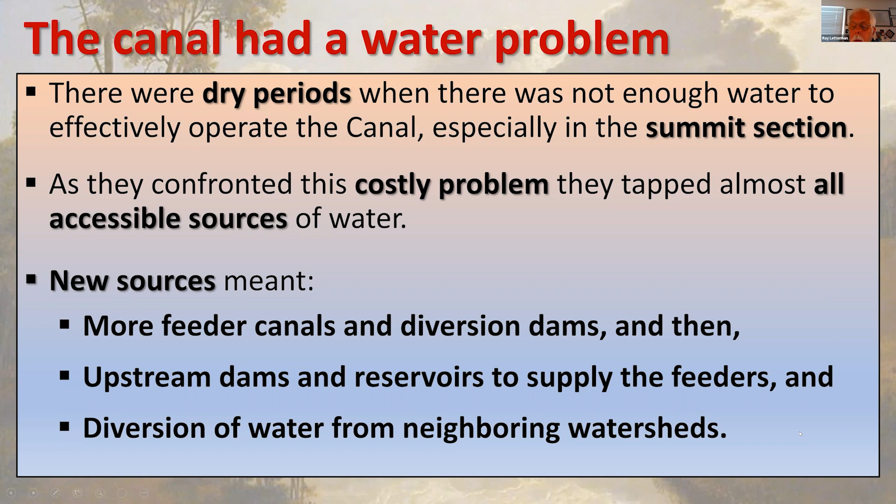So as I started to say earlier, the water problem was greatest in the summit. Here's the summit section. In the very, very beginning, some people thought that they had a very good source of water at Lake Erie. They could use that water all the way down to Albany. And of course, you would have to have a much longer canal because the canal would have to move south toward higher ground all the way along.

And you would lose water, of course, as it flowed across the state, and the amount of water that you would have to have flowing up here to meet the needs of leakage and so on down, and to make the locks work and so forth, would be so huge, it would be like a water slide at a water park, I suppose. There would have been just too much current up here for it to be usable. So that was impractical, but Lake Erie took care of the western parts of the canal very well.

And then in the middle here, of course, what do we have? The Finger Lakes. They put dams on, I think, all of the Finger Lakes eventually, and would release water during dry periods, and water problems weren't that great over in this part of the canal. But here in the summit section, there were problems, and I'll explain a little bit about that. On downstream here, going from Utica, the eastern side of the summit, on down all these locks, they were able to make do with the water that was flowing in that direction from the summit, and a few sources along the way.

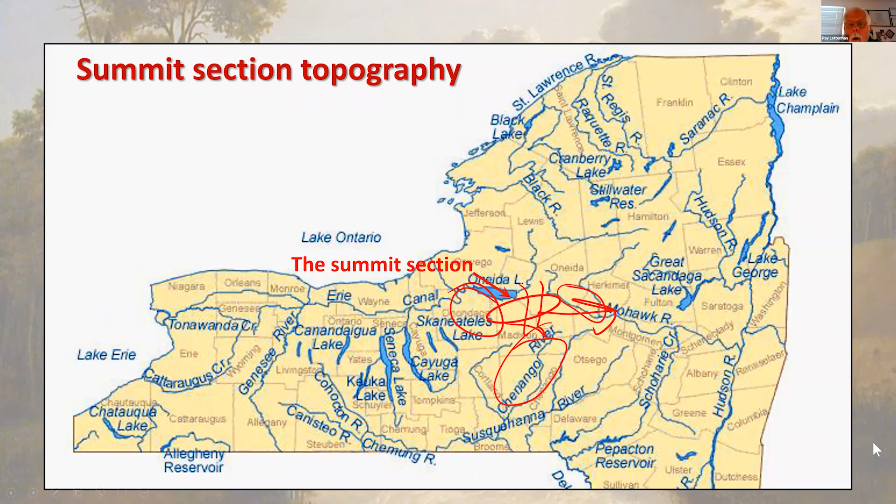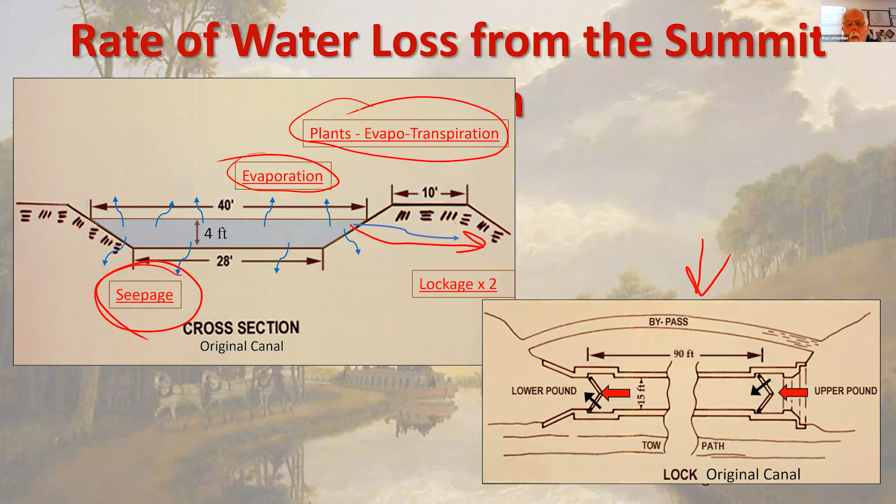You also had these losses, and this was the important one. I'll show you in a minute. Seepage, especially through the man-made fill berm where the towpath was located. You had a little bit of loss to evaporation, and there were often plants growing along the edges, and you had evaporation from the leaves of plants, evapotranspiration. So that was part of the loss. Let's just talk about the total that you can see. Seepage was the greatest flow rate. Evaporation, not so much.

Lockage would be at maximum when locks were being filled and emptied, say every 20 minutes or so, every hour of the day, which of course would be rather unusual. But that represents a maximum loss through lockage. So we end up with about 200 cubic feet per second for the summit section. Just for comparison, the City of Syracuse uses about 70 cubic feet per second of water for its drinking water supply from Skaneateles Lake. Limestone Creek below my house averages through the year about 150 cubic feet per second. So if that helps you picture water flow, that's what we're talking about.

But this is very important: over that 60-mile summit section, that loss of 200 cubic feet per second would be about 8 inches of depth per day. In the original canal, they only had about half a foot of depth to play with, the clearance below the bottom of a loaded boat. In the enlarged canal, you had about a foot. So it didn't take very long before you were in trouble.

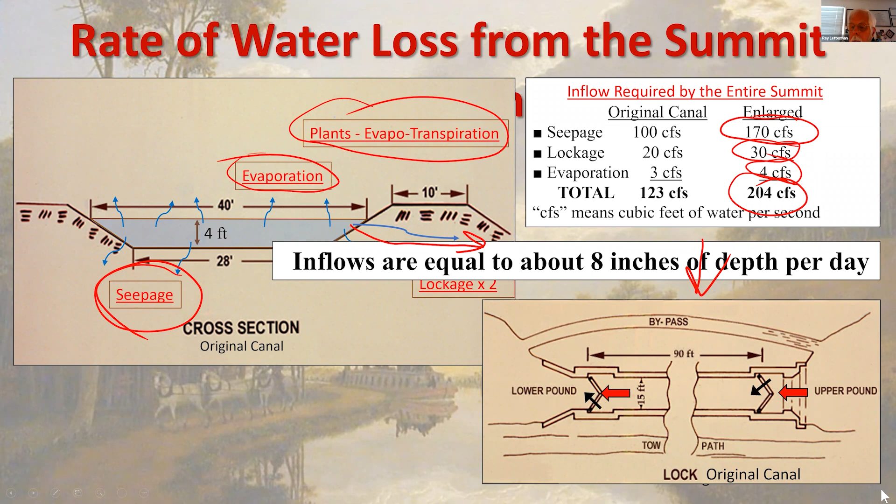And the troubles were the following. When the clearance between the boat and the bottom became less than, say, 6 inches or 1 foot, then drag increases. The water that you're pushing out of the way has to move underneath the boat, and it increases friction on the bottom of the boat, and it increases the work that the mules, horses, have to use. And I asked this mule what he thought. They don't like it.

The other problem was that when you had low water, the boats could not carry a full load. So for example, in the early canal, if you had a 30-ton cargo, you could gain about 6 inches of draft if you reduce that load to, say, about 23 or 25 tons. But the owner of the boat didn't earn as much money. And of course, the Canal Corporation didn't make as much from tolls if they had to reduce the load. So when I said it was costly, that's what it cost in terms of loss of tolls and income for the boat owner.

There were also long waits and lines at the locks. And I read in one of the good books, maybe about the Erie Canal, that there would be long lines; you'd have to wait at a lock for someone to come down before you could go up. And during these long waits, the people working on the boats would run to the nearby tavern and try to get back on the boat later.

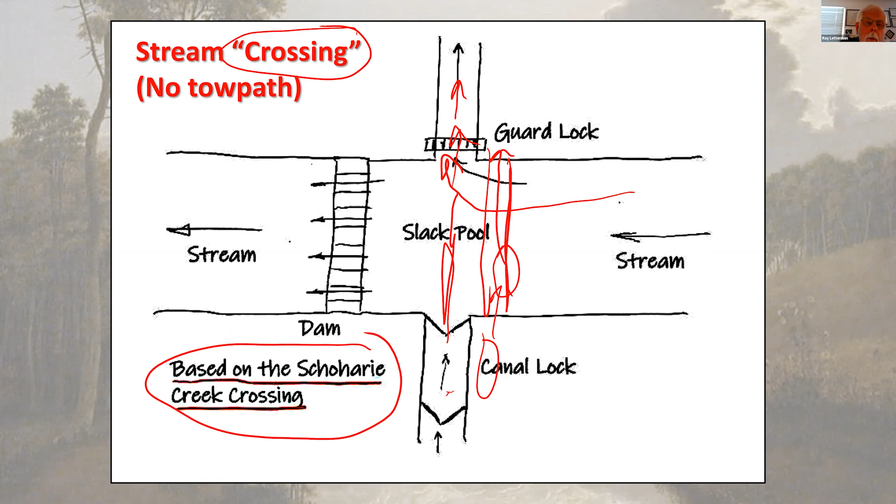Did anyone hear the lunchtime speaker at the Erie Canal Museum the other day? David Brooks, I think his name. He's the person who looks after this historic site at Schoharie. But he said they had so many problems with the dam washing out that they eventually put in a big aqueduct. And then this canal right here became a feeder canal, sending water on downstream where it joined the water that came through the aqueduct. So they got tired of replacing this dam. After this it just became a feeder system, which I'm going to talk about next.

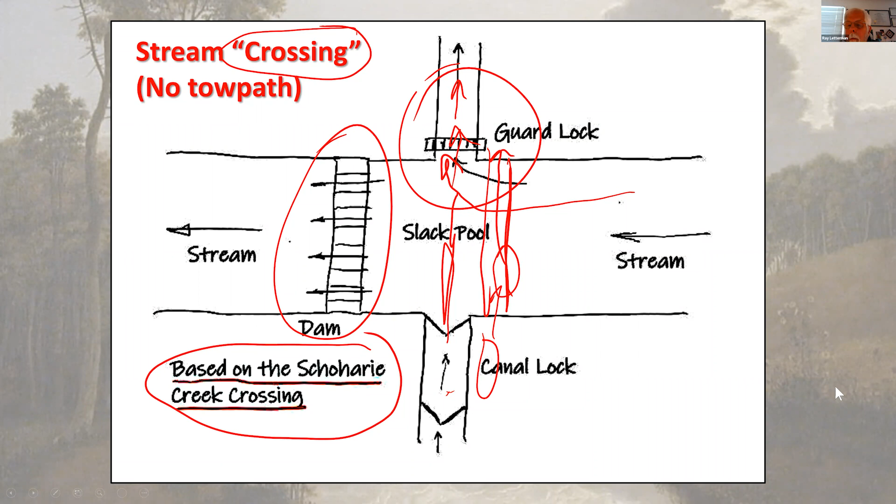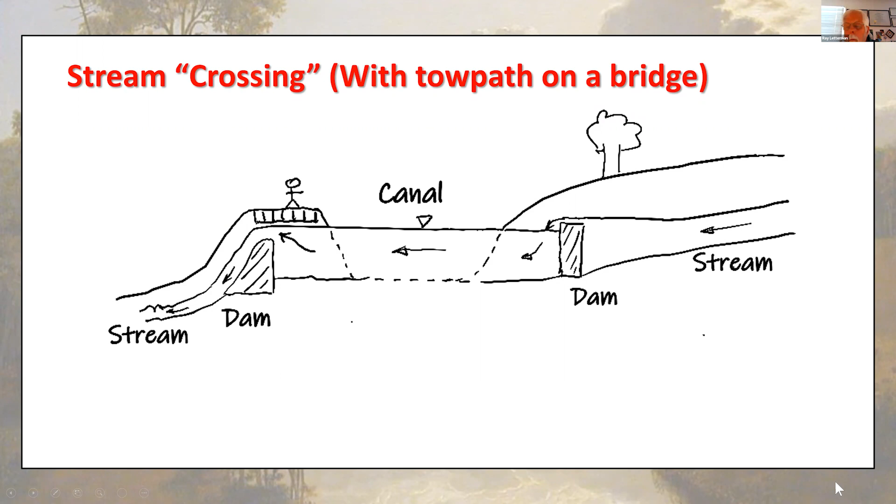So this is a stream crossing, just like you might see on a level spot, like at Rome, where the water can go in and out of this elevation drawing. They put a dam or a weir over here underneath the towpath, a bridge over the towpath. So there were other arrangements that you'll see if you find any parts of these supply locations.

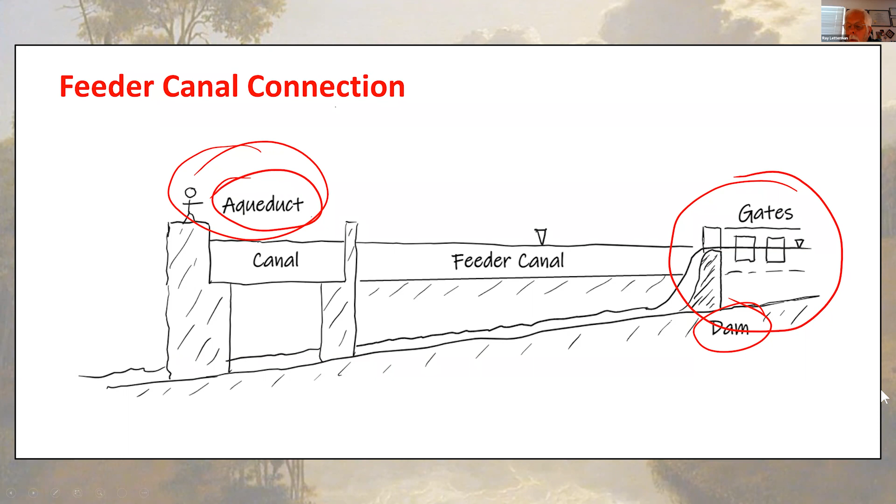But if you're going across the canal, look for aqueducts. There's a feeder canal, or at one time there was a feeder canal and a diversion dam and gates and so forth. Many of those are gone now, but we've got a few still left in the area, as we were talking earlier.

Here's a crude plan drawing of the feeder canal. Here's the feeder canal tucked in along the hillside near the stream. Here's where the stream goes down and under the aqueduct, and the gates controlled it. When you had a flood in the stream, you could use the gates to protect the main canal. And that was very desirable, because with the canal operation, they hated floods. Floods were very expensive. They were always repairing flood damage in the late spring.

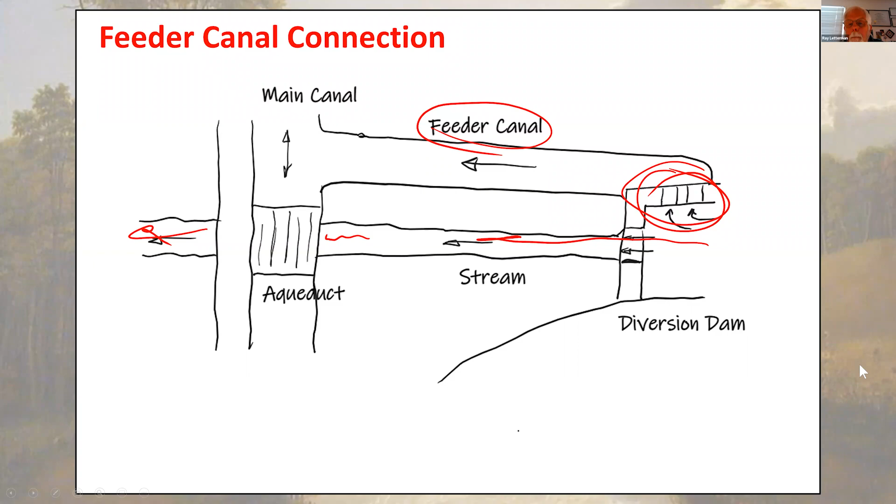And here's, of course, our good old Limestone Aqueduct on the Old Erie Canal State Park. This is going over to DeWitt, and this was built probably back when they were turning this part of the Erie Canal into a feeder for the Barge Canal. This channel was built so the water that came from DeWitt, from the Butternut Creek feeder, they call it the Orville feeder, had a way to get over toward the summit of the Barge Canal near Rome. So this was basically a conduit that made this a part of the feeder system for the Barge Canal. And of course, today we benefit from it because it makes the park better.

And of course, these gates are over by Fayetteville by the new bridge. The state took the dam out, I don't know, 10, 12 years ago, maybe. These gates are not for the canal, but were there to control the water to the old canal when it became a feeder stream for the Barge Canal over by Rome. I'll show you here an old picture.

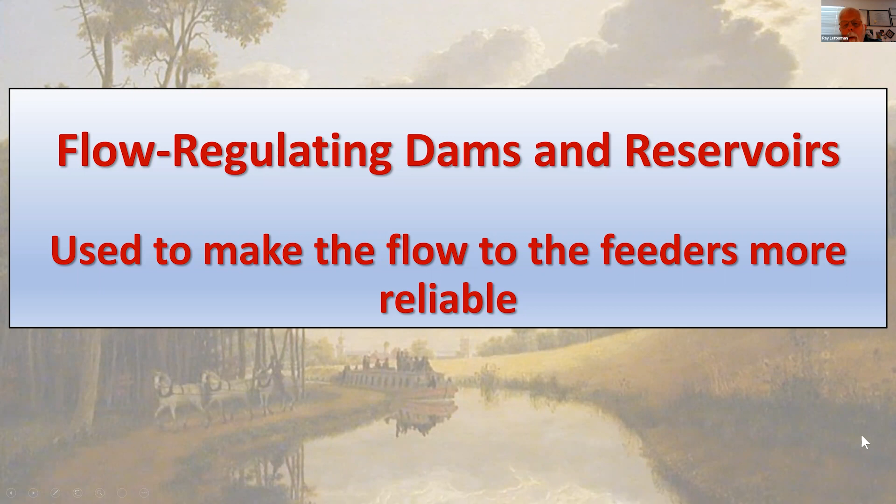So they didn't, in most cases, get enough water. They would add a feeder canal, diversion dam, and so on, and then they'd have a drought, a dry period, and there would be problems with water depth. And so they would then go to the next stage. Remember, this was a trial and error type process. And they built dams, large reservoirs. And these were never tiny reservoirs. These were hundreds to thousands of millions, like a billion cubic feet of stored water. These had to be fairly large to be useful at all.

I wanted you to see what all the original dams were, these stone and log wood crib dams. This is from a picture over on East Canada Creek. That was the only good log crib dam picture I could find. After about 1900, wherever they wanted to keep a dam, they built concrete dams like this one at Old Forge. This is the Old Forge Reservoir here, which is First through Fifth Lakes. They're above Old Forge, if you've ever been in that neck of the woods.

That, I'll tell you a little bit more about later, is basically a flow regulating reservoir for the mills at Watertown. That's why this was kept and why the log crib dam was replaced. But you know, this concrete dam is like the ones they kept; almost all of them, the change to concrete occurred around the turn of the century.

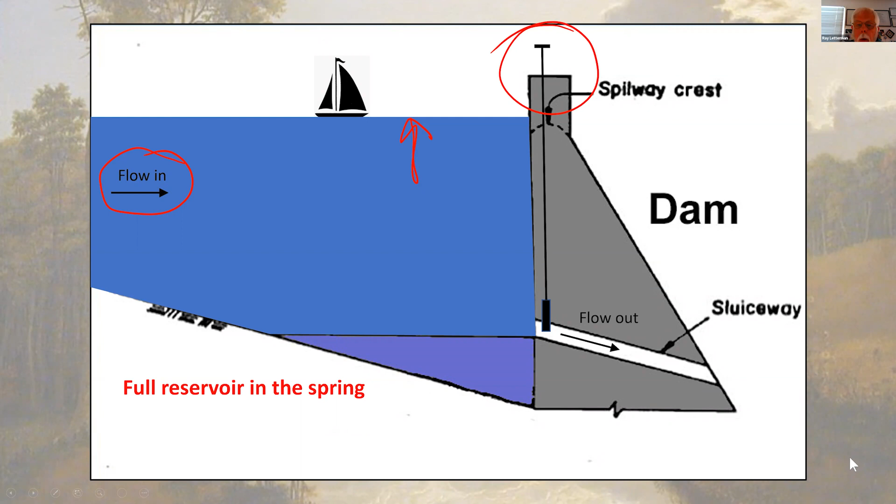They had a dam tender that tried to keep the dam from being washed out during storms, but also to be there to release the water when that needed to be done, during the next period, which of course is in the summer. Early fall was typically when you needed to augment the downstream flow. So that is what a flow regulating reservoir is. It's what they do today. And there are many of these around.

They're no longer in this area used for supplying water to canals during low flow periods, but they are used for hydroelectric generation. So to get more consistent, more profitable hydroelectricity generation, it's good to store water and release it during low flow periods so you can get the maximum utilization of your turbines. In the spring during high flow, the flow is greater than the capacity of the turbines in many cases. And then in the fall, it would be less than. So you release this water and try to keep the flow in the stream.

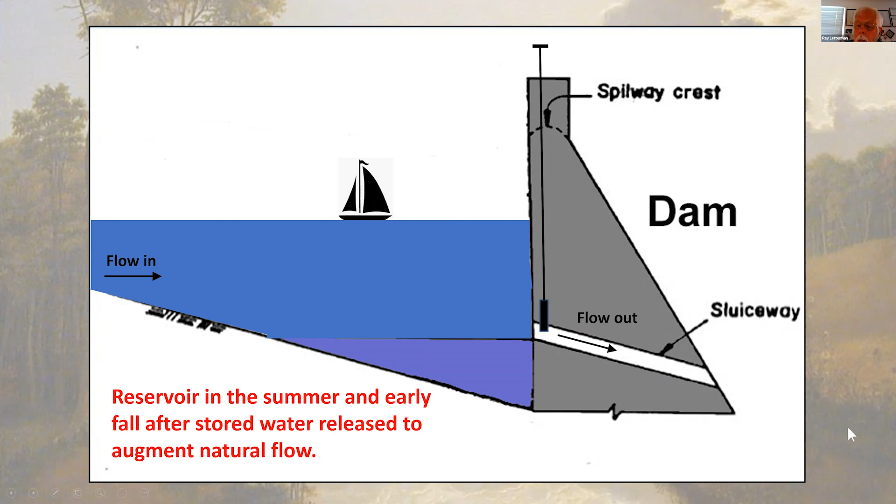And so just to give you a little picture of our local vicinity, the flow regulating dams and reservoirs over here, Onondaga, and then many of them over here in Madison. And all of these are connected to one of those feeder canal streams that I talked about. Almost all of them are connected with an aqueduct on the canal.

Here's the good old Summit section, over Syracuse. Jamesville Reservoir is, of course, on Butternut Creek, and that's what supplied water to the Orville feeder that we know goes in at the end of the park in DeWitt. DeRuyter is the flow regulating reservoir for Limestone Creek, and Cazenovia Lake here and Erieville are for Chittenango Creek. And of course, we had a Chittenango feeder. It's mostly all gone now, but there might be a little bit of it left next to the museum.

And then all of these over here were left over from the Chenango Canal that went from Utica down to Binghamton. When the Chenango Canal was decommissioned in the 1870s, they blocked it off here, and all these then fed into the Chenango Canal and went down to the Erie Canal at Utica. So they turned those into flow regulating reservoirs like the others, but used the Chenango Canal to get the water down to the Erie Canal.

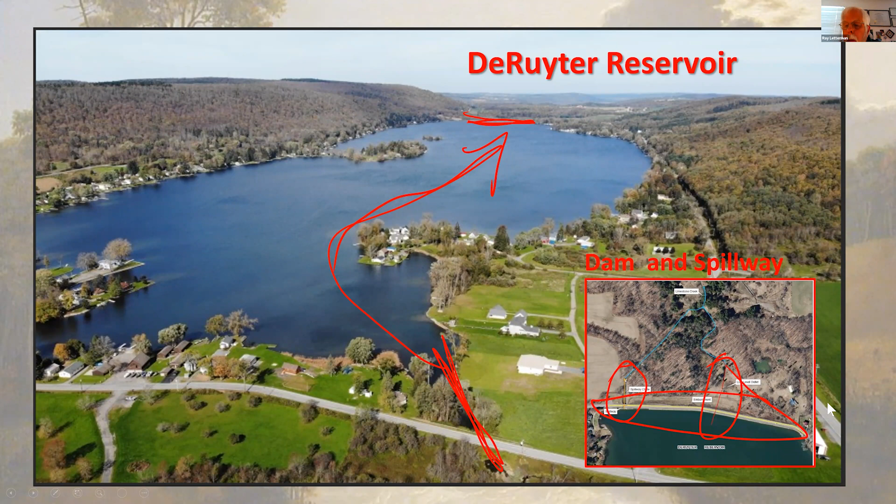So they added lots of feeders after the enlarged canal started in 1866, after they finished the enlargement. They left things pretty much alone as far as water supplies are concerned, except for this summit section where they had the most problems, as I've been saying. But if you look at the dates, Limestone Creek feeder was built in 1852. And then they probably weren't getting enough flow in the creek during dry periods, and they added the DeRuyter Reservoir. And likewise for Butternut Creek, the Jamesville Reservoir in 1874.

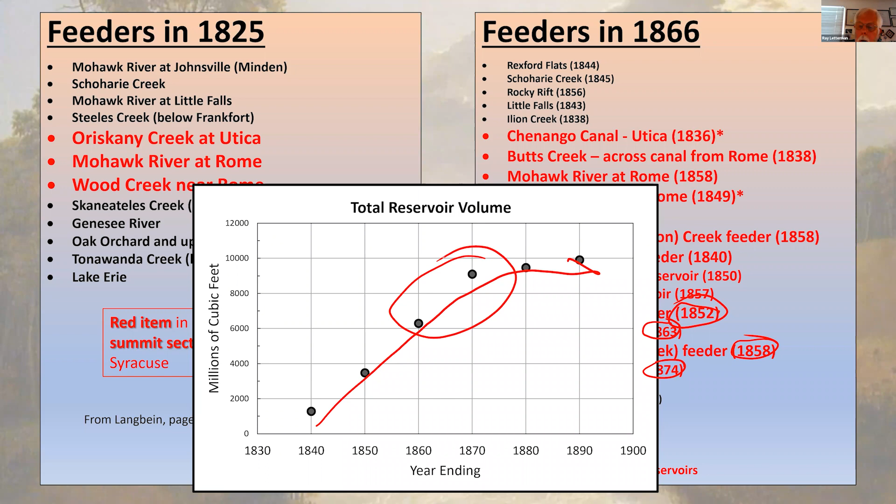So here's how the total reservoir volume increased. Much of this increase here is from what I'm going to talk about next, the Black River watershed up in the Adirondacks. So I mentioned this, the DeRuyter Reservoir, Susquehanna River water. It was at this location sent to the Great Lakes through Limestone Creek, Susquehanna River over above Utica, the connection to the Chenango Canal that I mentioned, and it sent water in some places to Oriskany Creek, but that was, you could argue, Susquehanna River water to some extent, and it was sent into the Mohawk River watershed.

And here's the diversion that caused interesting problems that I'm going to talk a little bit more about, the Black River, which is in the Great Lakes watershed. And it sent water to the Hudson River watershed. You could also argue that maybe some of that gets back into the Great Lakes, but it is still a conduit of Great Lakes watershed water to the Hudson.

The Black River. Here you can see the Susquehanna River water that I said went through the Chenango was here. The Susquehanna River water at the DeRuyter was here. And then we have the Black River watershed. These are in the Great Lakes. Black River watershed is in the Great Lakes watershed. And of course, the Mohawk River goes this way.

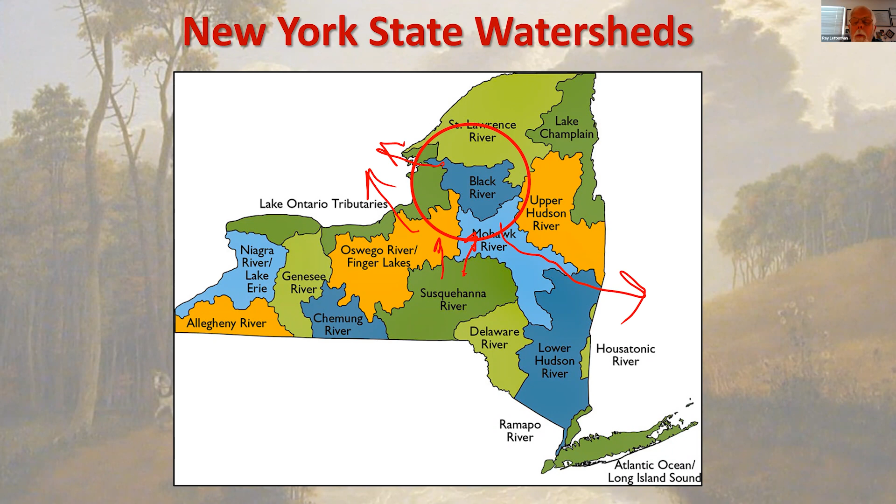So the Black River became a very important source because it is a wet watershed. Typical total precipitation in New York is 35, 36 inches a year. Up in the Black River, it's 50. And of course, a good part of that is like today, lake effects. Well, lake effects, no, maybe isn't the case today.

So how did the water flow from the Black River to the summit section of the canal? There was a low diversion dam and small impoundment at Forestport on Route 28. You cross the big iron bridge at Forestport going up Route 28. That is the pool there you'll see underneath the bridge that feeds into this diversion dam. Then they had this beautiful feeder canal from Forestport over to the village of Boonville, and then it flowed down the Black River Canal to Rome.

And the Canal Corporation, they were eager to get this water from the Black River for the summit. They weren't all that eager to build the Black River Canal, but the Black River Canal did give them a conduit down to Rome. And so the people in the Black River Valley up there, the farmers, and particularly the sawmill people, wanted to get their lumber to markets in New York City and so on. So they really lobbied for a canal.

Here's just a couple of pictures, current pictures. Here's the diversion dam over there. You can just barely see it. The truss bridge over Route 28 that most everyone has crossed, I would imagine. Here's the diversion dam. Of course, it was a log crib dam in the beginning. Now it's concrete and stone. Here's a beautiful feeder canal, neat bicycle path, 10-mile hike, bicycle ride.

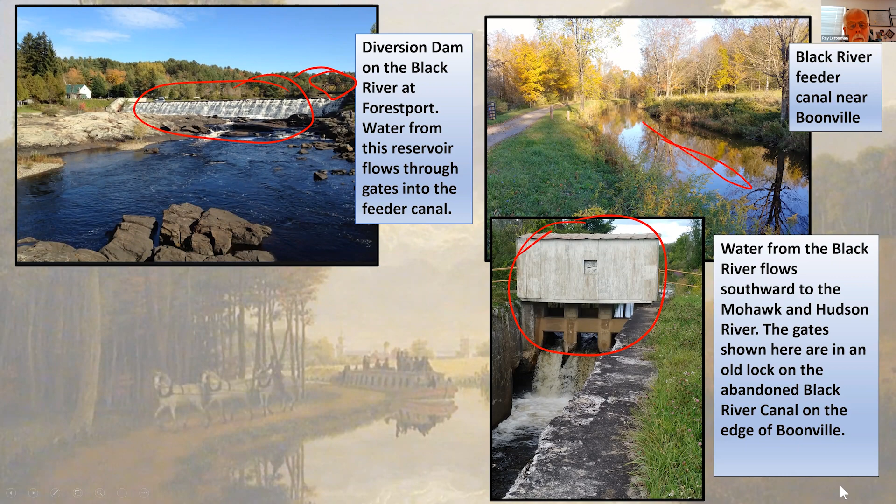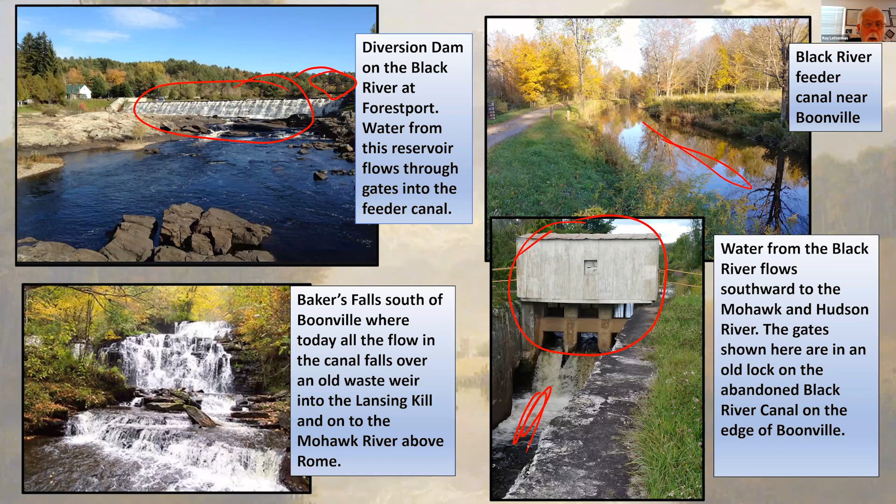Today, the Canal Corporation, this is a contemporary thing, there are gates because there are no more locks. The old Black River Canal is basically gone. There are parts of it in the valley there, in the gorge, but they had to build gates in order to keep this water at level in the canal and at their swimming hole over in Boonville and so on. So here are the gates that release the water. So today it still goes downstream to the Mohawk River, and they use it to fill the Delta Reservoir. This is where the water from right here flows south toward the Mohawk River, and it goes down a waterfall into the gorge.

So to design the system up there, they did some crude measurements. An engineer in the early 1830s looked at the flow rate in the Black River. They estimated that they could get about 260 cubic feet per second reliably, and they were wrong.

They used 80 of that to make the canal work on the downhill side down to the Black River at Lyons Falls, and then they used 180, and they sent that down to the Erie Canal at Rome. And the reason I'm pointing this out is that this diversion of 180 cubic feet per second was a real bone of contention in the Black River watershed because of all the mills that were located up here at Watertown.

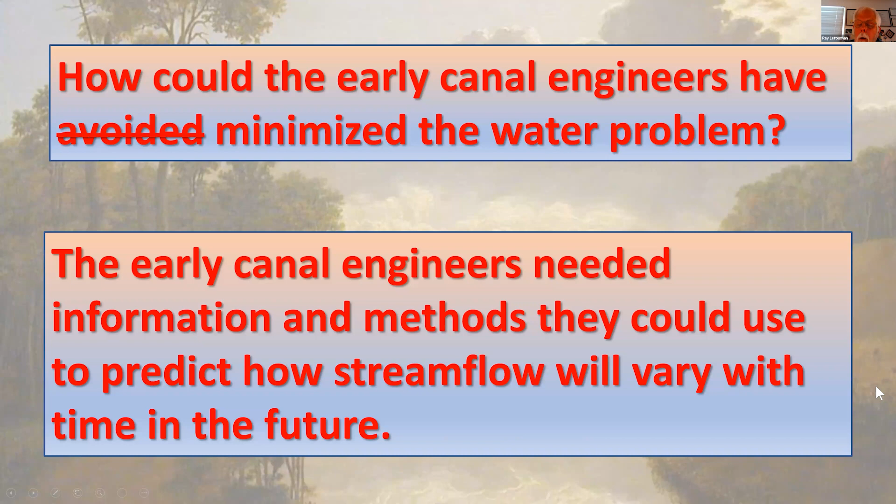In fact, it took a long time for us engineers and others, hydrologists, to figure out how to get the data. And it wasn't until the 1930s and 40s that we really had the mathematical tools to analyze this data in a way that we could make engineering sense of it, use of it. They needed data, information, and methods that they could use to predict the stream flow in the future, and that was not possible back in the 1800s.

So what happened in the late 1800s? We started to get stream flow data from the U.S. Geological Survey. This is the gauging station on the Black River, just downstream from where the feeder is located at Forestport. This is where the pressure of the water is measured that gives you the level of water in the stream, and that goes to the U.S. Geological Survey today to their computers. I'm not going to do it now, but it's logged in real time. The data is collected. You can look at a graph of stream flow.

There's about 8,000 of these USGS stations around the country. This is one of the old ones, because I'm sure the mill owners and the people that were operating the canal wanted this data, needed this data. And so it's been there a long, long time. The oldest one is about 1890 from down on the Rio Grande River.

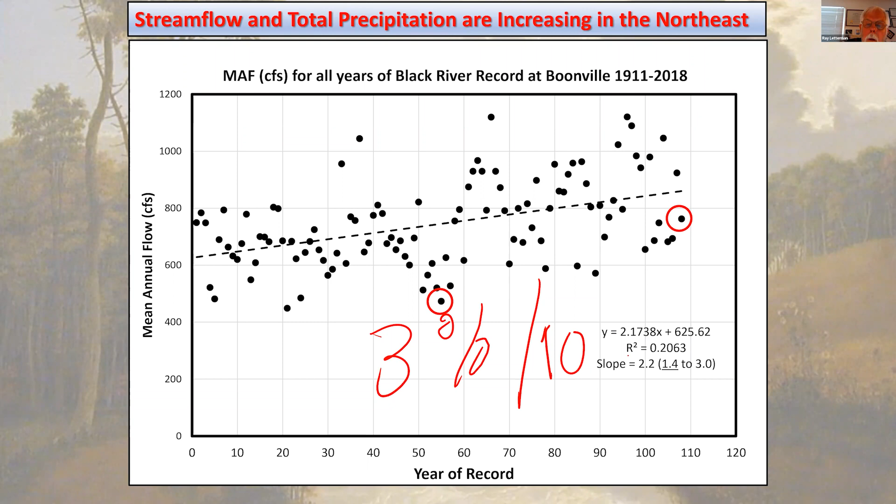And it seems likely, if you look at the rainfall data, New York State up here is getting wetter. Since 1950, about 6 or 8 inches on top of the average of 35, 40 that we had then. And that turns out to be just about what this predicts here. So this is about 3% every 10 years in stream flow. And the rainfall increases about 3% every 10 years. So it seems very likely it's the increased precipitation associated with climate change, and hydrologists and others have done some really excellent work showing how this is related to temperature increases and climate change.

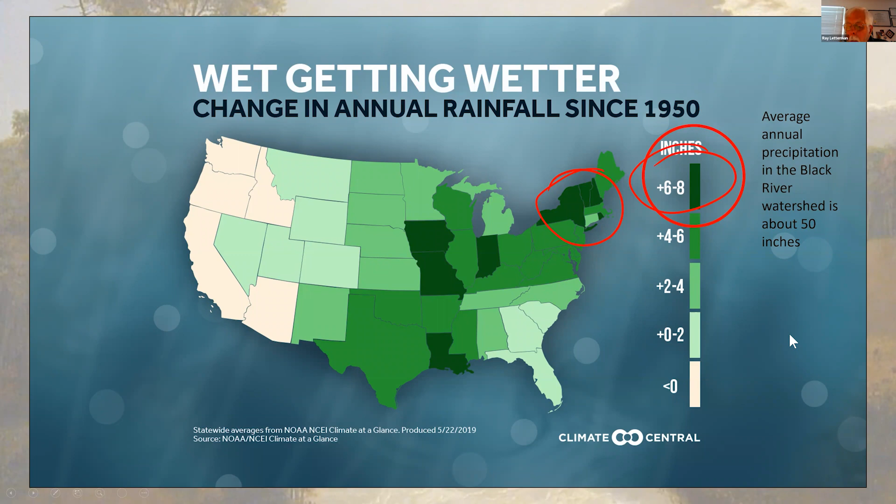So this is a problem. The engineering tools that would be used to design canals and reservoirs and so forth are not working out too well. And this hurts us in several ways. Also, we're observing these changes in heavy precipitation. More rainfall is falling in the top 1% of the daily events. So this is messing things up as far as engineers are concerned, especially when you're an engineer trying to test the ability of a spillway or whatever to pass a storm flow rate.

It's getting more difficult to figure out just what sort of standard you should use, how you should calculate the values, and so on. So engineers are wrestling with this problem of nonstationarity combined with climate change. So it'll be interesting to see how this plays out.

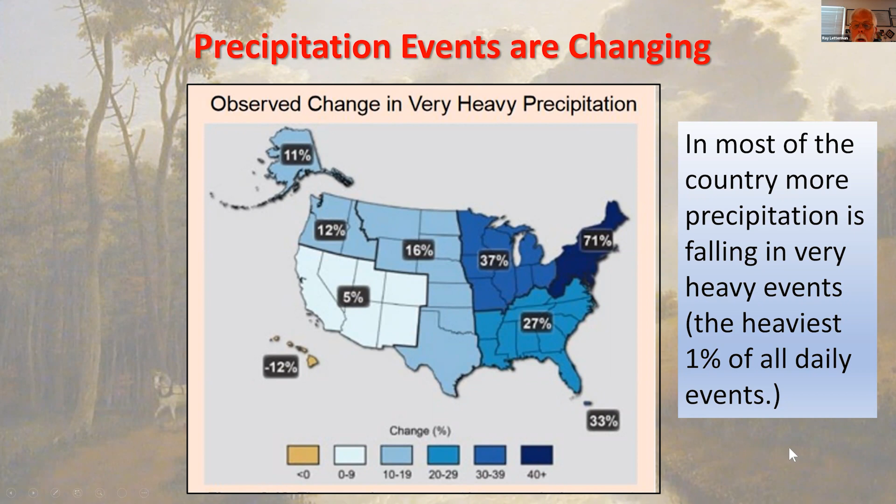So I wanted to finish, I'm just a couple minutes late here. Let me finish quickly. This is the Barge Canal. It's a lot different than the old Erie. There's no mules, no towpath. The tons of cargo went up to hundreds of tons. And of course, the barges are pulled or pushed by tugs, diesels. And the thing is a lot bigger, 150, 200 feet wide, 12, 15 feet deep. The summit section is still problematic. It's over between Oneida Lake and Rome.

And the engineers, when they designed it, still didn't have much stream flow data. They had, of course, the bad experience of dry periods on the Erie Canal. So when the engineers designed to provide this water, especially for the summit section, it was no holds barred. And they basically designed 3 reservoirs. They built 2, and it's interesting where they might have built the 3rd one if they thought they needed the water.

So they built Hinckley Dam and Reservoir on West Canada Creek, above Utica. This is used for hydropower now, for water supply for the Mohawk Valley water supply system, and to some extent, it's used for flood control. And then they built, about 6 miles up above Rome, the Delta Dam and Reservoir.

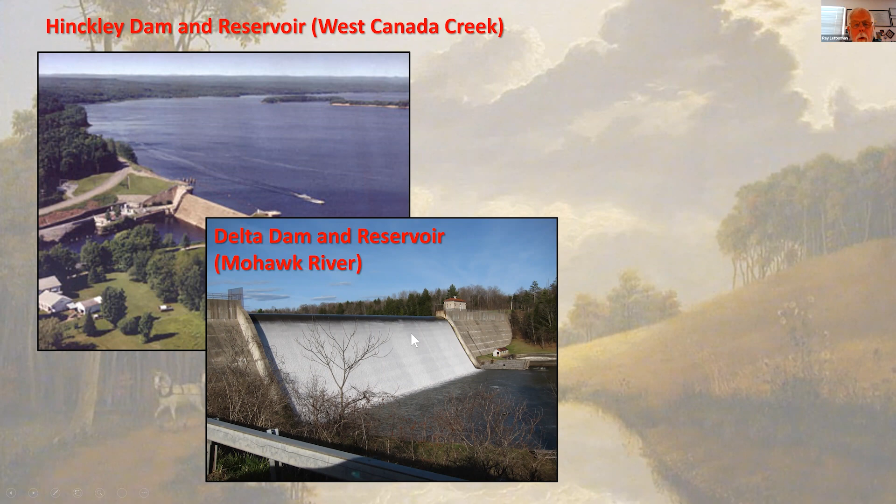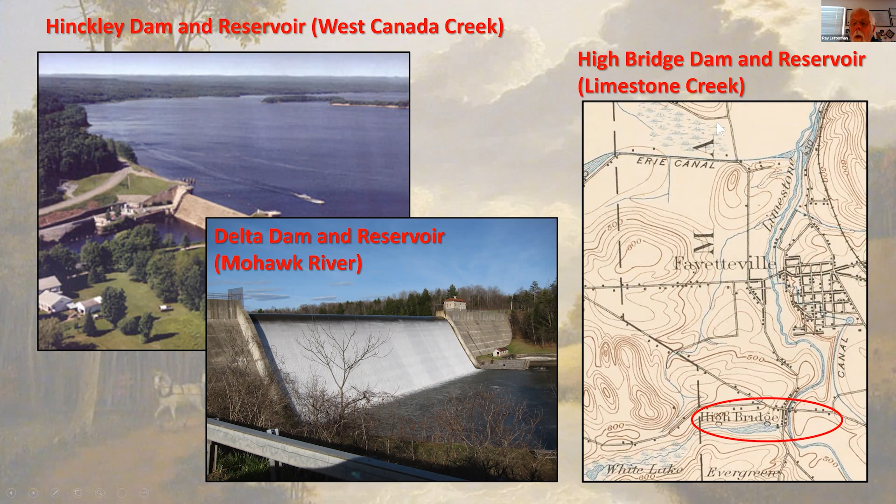But anyway, if you think about the US Geological Survey maps that I showed before of the canal down by Fayetteville, in the 1930s, instead of labeling the canal at that location as the Erie Canal, they called it the Barge Canal feeder. So they felt they seriously needed this water from Limestone Creek, Butternut Creek, and so on.